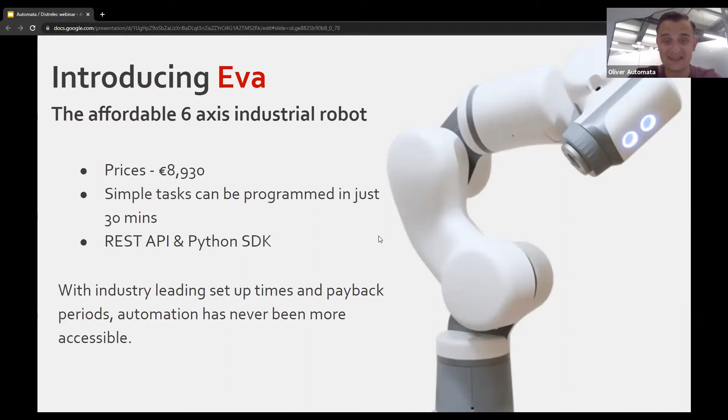And that gives you a reach of 600 millimeters. We often refer to Eva as a robotic arm, and that's probably the best way to think about it - if you think of it as your own arm, you can picture how you can build in different applications based around that philosophy. Eva's got a maximum payload of 1.25 kilograms and a repeatability of plus minus 0.5 millimeters. The other very unique thing about our robot Eva is that the controller for the robot is actually built into the base underneath axis 1, as you can see in the picture on the right there.

That just means it's a very small, self-contained unit that takes up a maximum footprint of 160 millimeters by 160 millimeters. This gives you the flexibility to deploy Eva on or around machines that already exist without worrying about taking up extra space with external controllers or bulky stands that you need to deploy on site.

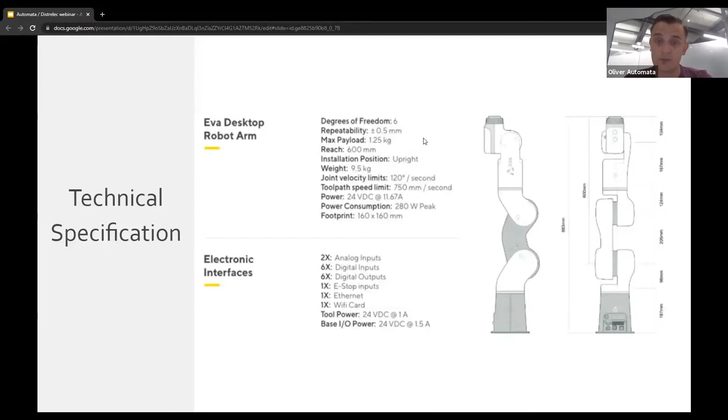I just want to talk about Choreograph. Craig's going to give you a demonstration shortly so you can see how easy it is to use. We designed and built Choreograph to make it as simple and straightforward as possible for our customers to program the robot with little or no programming experience.

What it gives you is a really, really simple GUI that allows you to interact with the robot in real time and build what we call toolpaths, in order to program the robot to tell it to go from point A to point B and so on and so forth.

It's great for really simple or really complex tasks, as you'll see in some of the videos I'll show you later on. You've got built-in grid functionality, which allows you to pick and place items from perhaps a tray or place items into a box.

You can use multiple different users and permissions on the robot. So once somebody's programmed it, you can have a user account dedicated to somebody that will just come in and hit start on the program and allow it to run. It can be programmed in under 30 minutes.

One of the strongest points here is that it can be accessed directly through a web browser - there's no additional software, no disks required. You can load up the robot, load up a web browser on any device, whether that be a laptop, a PC, a mobile phone, or a tablet, and run those programs and toolpaths without needing a special controller.

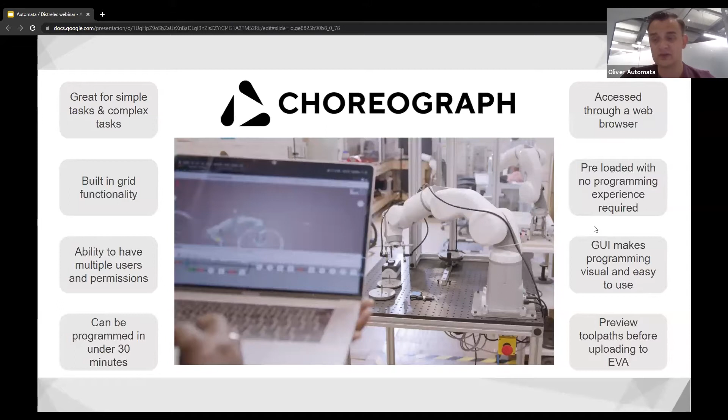It's preloaded with Choreograph, so all you have to do is hit play and away you go. The GUI makes it very simple and easy to use, so you can see what you're doing as you go along - it's very intuitive. You can then preview all of the actions before you upload them to the robot, so you're not going to run into any incidents when you're actually live in the field.

Fantastic, thank you Oliver. Alex, if you could cut those slides, we're going to go live to our little demo room. I'm surrounded by robots at the moment - I've got one behind me here, but I'm going to pop round into the other frame so we can use this robot here. So this is Eva. As Oliver said, we're talking about going from box to toolpath in 15 minutes, and this is how the robot comes out of the box.

So you come through the assembled robot. All we've done here is added a gripper. This is a Schunk EGP50 gripper. We've got a little mounting plate here and a simple cable from the gripper to the head I/O.

That's just sending digital signals to and from the robot to the gripper so we can operate it simply. In terms of mounting the robot, which is probably your first concern, we've just got 4 M6 bolts in here, secure it down nice and simply. So if you want to either build a cart to move it around, or build a table, you can just drill through a sturdy table and get that up and running quickly. Again, as Oliver said earlier, oftentimes our customers are moving it around.

And actually you'll see here, we've got the base of the robot, and that houses the controller of the robot. So there's no external things to move around with it. You can take basically just this unit, put it on one toolpath in the morning, put it on another in the afternoon, and you're absolutely grand.

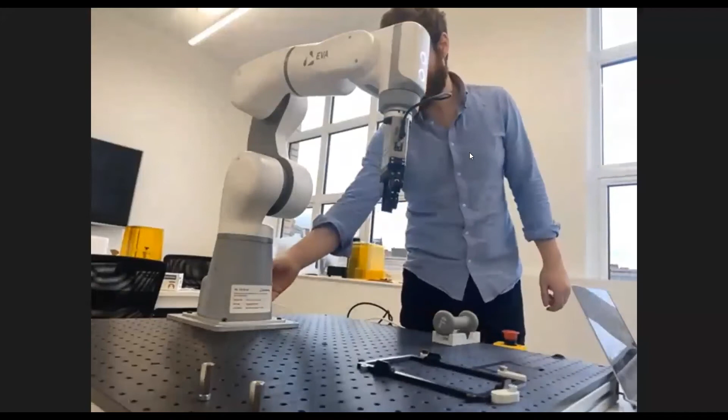It's just a case of plugging in the power and the emergency stop button, the big red button, which is here. You know what happens when we hit that, everything stops. So yeah, as I say, just plug in the power, plug in the e-stop, and then I've also plugged in an Ethernet connection just for today, so we can connect to my laptop.

Again, as Oliver touched on earlier, we've got a Wi-Fi connection connecting it to your main network, or indeed you can connect to the robot as if it was a Wi-Fi network itself by connecting directly. You see we've got this nice little label on the front here. You won't be able to read it, but it's got my Wi-Fi password on it there.

So yeah, EVA is a 6-axis industrial robot. So we've got axis 1 here, 2, 3, 4, 5, and a final rotational axis here, which you should be able to see in a second. I am going to unlock the robot so we can start moving it.

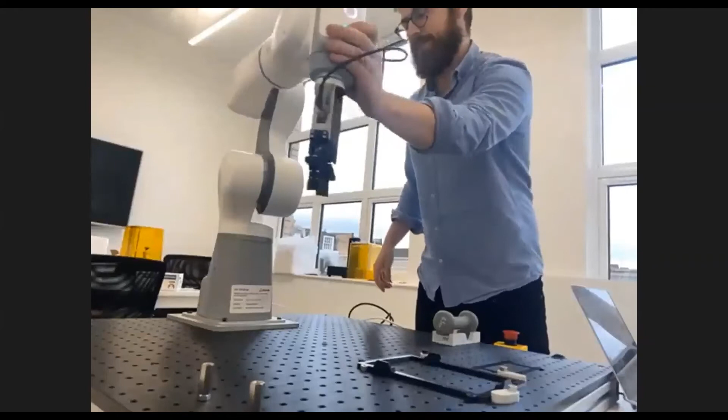So what you can see on the front here is we've got 2 buttons. And this button here is what we call the back driving button. And if I press that, it allows me to release the brakes on the robot, and I gain full control of it. So I can start to move around to the sort of positions that I want. And you'll start to see the kind of range of movement that we have on the robot.

So I'm going to go right out here. You'll see we've got 600 millimeters in every direction. So if you imagine just a circle around the robot and a sphere right up to the top, it's probably come out of shot with the camera, but we can fully extend right up there.

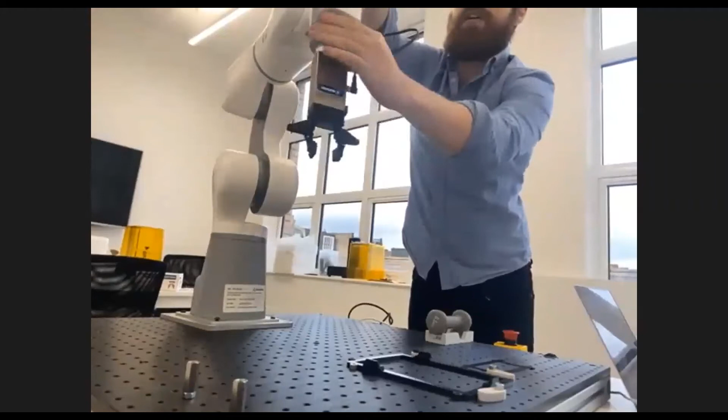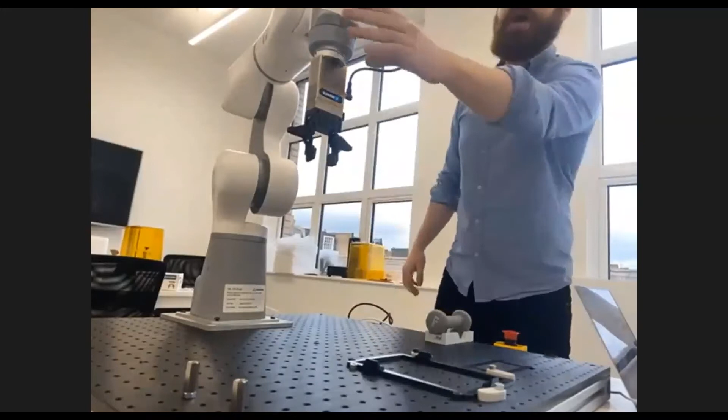And as touched on earlier, we've got that axis 6 final rotation as well, which is one that sometimes people miss. So 6 axes of movement means 6 degrees of freedom. So you've got movement through X, Y, and Z coordinates. And the back driving function is a really important part of what makes EVA simple and ready to program those first 2 paths really, really quickly.

You can drag and drop into all the positions that you need. There's no complex programming. You don't need to know any coding. It's really just a case of dragging it to where you need it and then stringing those things together, which I'll show you how to do in a minute.

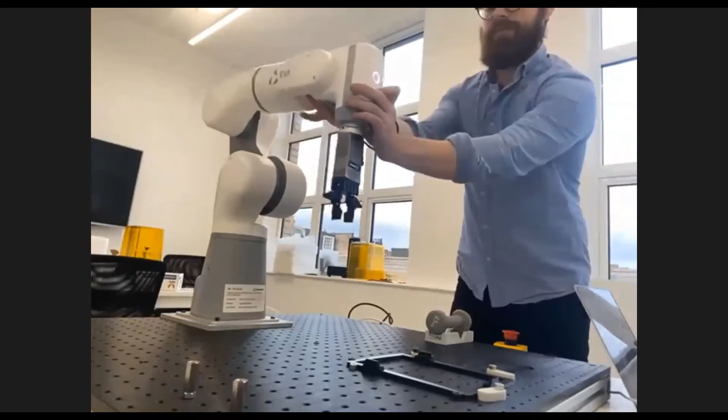The second button, which I'll tell you, is the waypoint button, and that just allows us to save those positions that we've moved the robot into. So if I was to move the robot down here, and I wanted to save that for my programming needs, I'd pop that button, and the robot would save the exact position that the arm is there, and also the X, Y, Z coordinates of the tool center point, which is just underneath there.

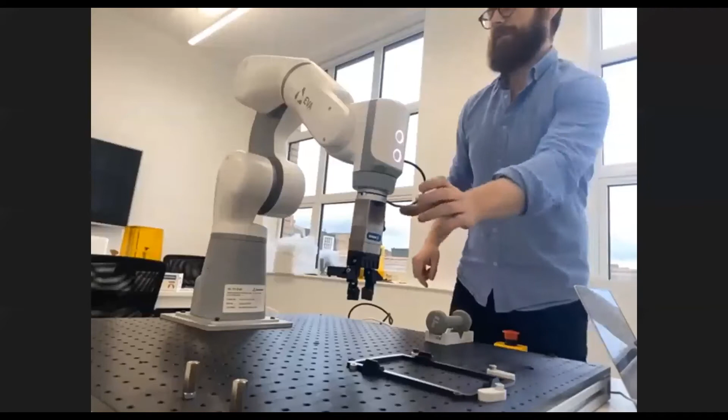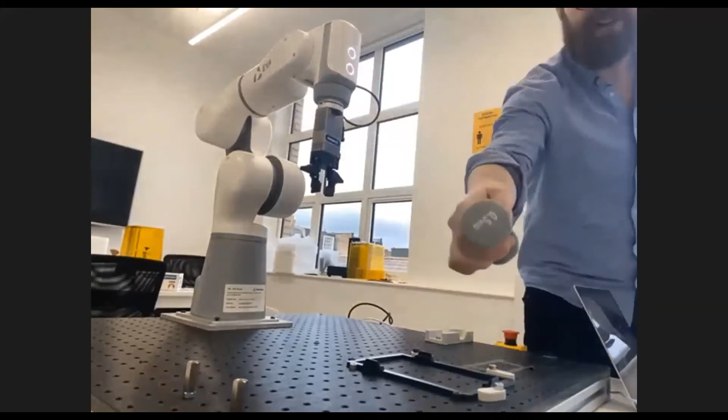So what we're going to do today is show you just how easy it is to program those simple toolpaths. So what I've got here is a nice little dumbbell here. I think it's from one of Oliver's sets, one of his heavy gym sessions there. That's half a kilo. And I'm just going to pop this down here. And we'll show you how easy it is to get one of those pick and place applications up and running. So what I'm going to do is share my screen.

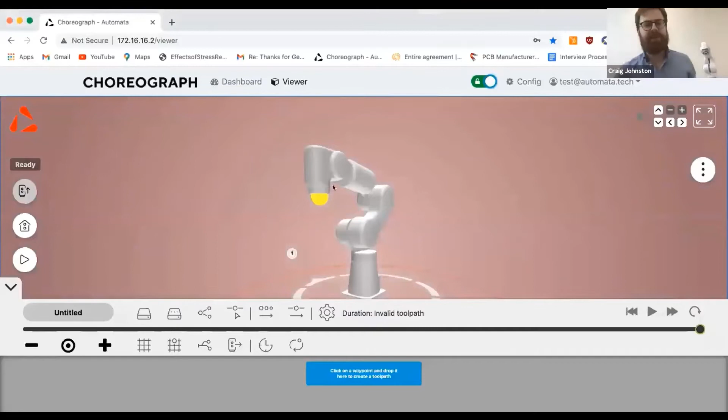So this is Choreograph, which Oliver touched on briefly earlier. That's our GUI, our way of programming simple toolpaths. You'll see a live representation of the robot in 3D, and with point 1 there, that was the point I just saved on the robot. If I grab that back driving button and move the robot, you'll see the 3D render follow around in real time. And we have the X, Y, Z coordinates of the robot, so you have a nice, easy way to...

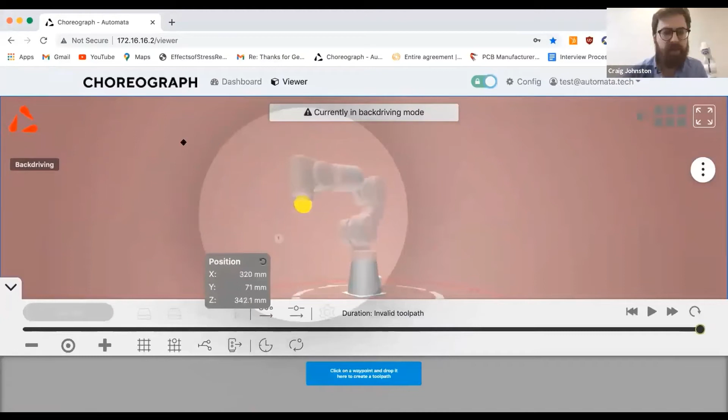I'm having some technical difficulties. There we go. Does not always love Zoom.

There we go. So yeah, you'll see that X, Y, Z coordinates following the robot around there. So yeah, I've got my dumbbell over here.

So to program that, I'm going to first drag that robot down using the back driving as we saw earlier, and put it in a position where I'm going to pick it up, right over the center point of the dumbbell. Then, as discussed earlier, I'm just going to save that waypoint. And you'll see number 2 there.

When we pick up, what we usually want to do is pick up and go straight up, like that. So we don't want to go across or to the side, we want to go down, then come vertically up by a certain amount of millimeters.

So instead of dragging and dropping that, I'm going to take this point and use this function here, which is the clone function. That basically just duplicates that waypoint. Then I'm going to use the absolute movement function here - you'll see those X, Y, Z coordinates again - and move it through the Z axis. I want it to move straight up, as I said, and I'll shift that up to around 220. That should do just fine for me.

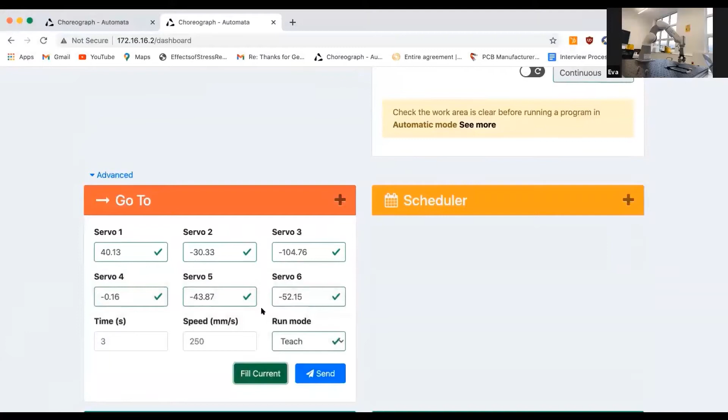I'm going to find out what state it's in at the moment. I can do this on the Choreograph homepage, which gives you live status of anything on the robot - it's the page you come to when you sign in. You can find out the exact joint configuration of the robot, the joint angles, the speed it's running in, the run mode, and what states the outputs are in. So at the moment, it's open - digital 1 is on 1 and digital 2 is on 0, and that opens it.

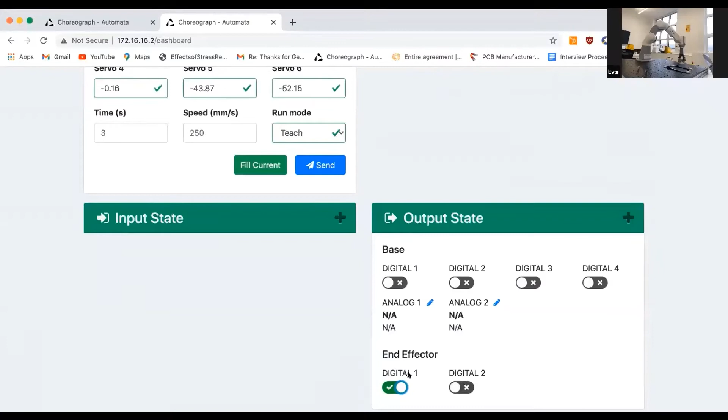So if I want to close the jaws, I'll have to put digital 1 to a 0 signal and digital 2 to a 1 signal. I'm going to go back into our toolpath here, keep digital 1 on 0, and put digital 2 to 1. What that's going to do is allow those jaws to close at that point.

And good practice here is just to put a wait in - you can see our little clock here. That's just to make sure the robot doesn't rush ahead of itself and doesn't pick up anything too quickly. Usually when I'm programming in a pickup, I'll put in a half-second delay there, and that's just good practice to make sure things run properly.

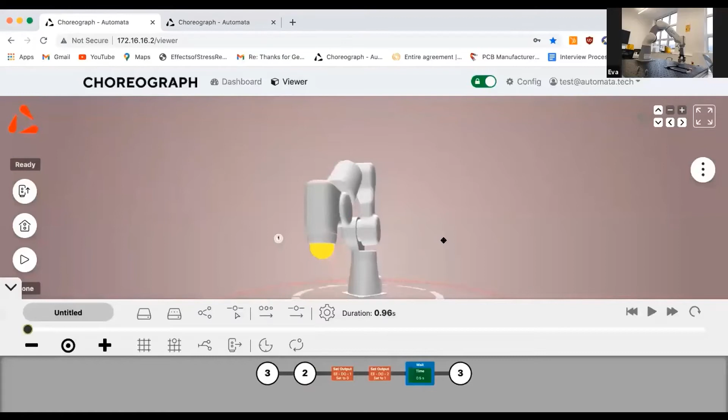The other thing I'm going to do for a toolpath that picks things up is make sure the jaws are set to open at the very start of the toolpath. Before anything kicks off, we want to make sure the robot's in a state where it's ready to do what we want it to do. So I'm going to set end effector digital 1 to 1.

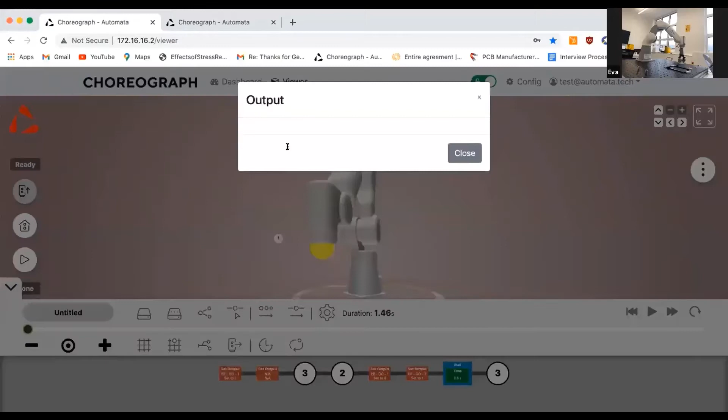Come on, there we go. It's not loving Zoom today - a month in lockdown over Zoom already, too many Zoom quizzes over the past month. It's too much. There we go, back on.

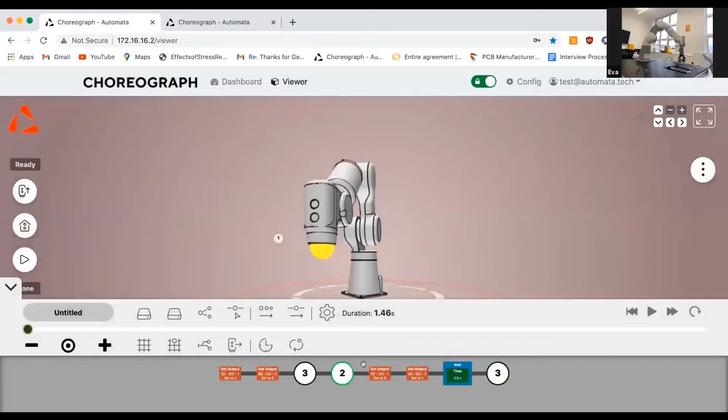I'm going to set end effector digital 2 onto 0. So as we said, at that start position it's going to make sure things are open, starting at point 3. I'm going to move down to point 2 - it's going to close, wait half a second, and move back up to point 3.

I'm slightly tugging on my Ethernet cable here, so we'll see if we have any more luck there.

I'm going to upload that toolpath to the robot, so it's housed on the robot's controller and it's ready to run. In order to start the toolpath, we use this button here and send it to the home position - that's the first point on the toolpath, so send it to point 3 there. Then I'm going to hit play and see how our first pickup goes.

Once we've programmed the first pickup, I'm going to get it to put it down right over here. We always test as we go when building these toolpaths. So I'm going to set it to loop once and run it in teach mode. Teach mode is really important - when programming your first toolpaths it limits the robot's speed to 250 millimeters per second, meaning it's not running too fast. If you've made a mistake in your toolpath, it's unlikely to drive into something at high force or injure someone working nearby.

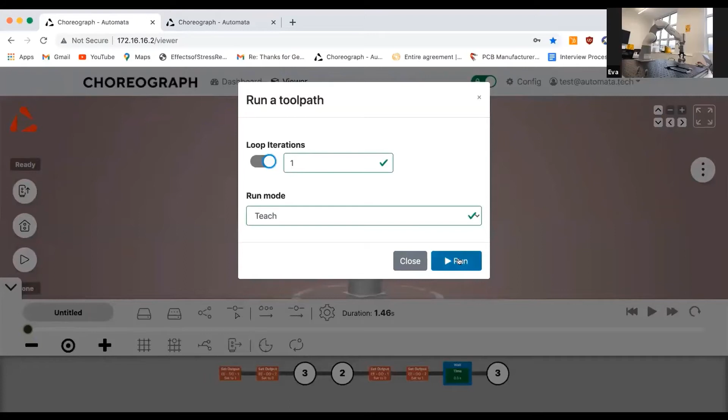As ever, when running my first toolpath I've got my emergency stop button right here, ready to hit if anything goes wrong. But I'm pretty confident this one should be okay, so we're going to hit run. And there we go - we've got the robot moving down, picking up the dumbbell there, nice and simple.

So what I want to do now is program it to move over here and put the thing down. One nice thing about this demo is that the robot puts the dumbbell down in the same way it was picked up. That's something people can underestimate about simple toolpaths - a human has a wrist, which gives full flexibility, plus fingers to manipulate things as you go. It's much more difficult for robots to manipulate things in flight. So if you're looking for easy toolpaths to start with, an application where something is picked up and put down in the same way is a great place to start - Oliver will have some great examples later in the webinar.

For the moment we're going to keep going here. I'm going to move over here, and we're going to save a waypoint again.

Dear me, it's not loving my cables today. They took away my usual robot - it's down in Aldershot doing something exciting today, without me sadly.

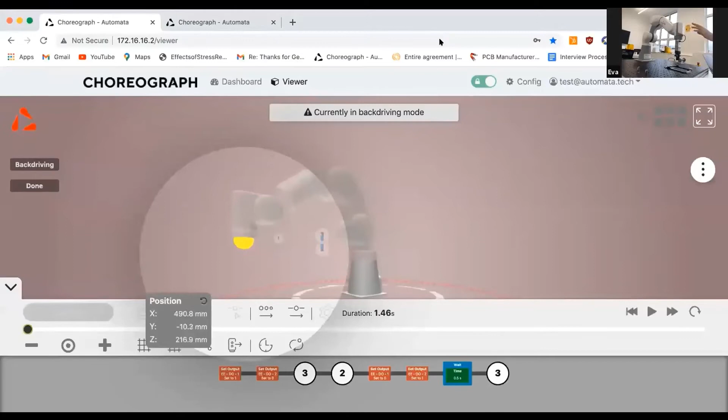So I am going to flip over to my other screen now just to show you programming the rest of this in real time. You should be able to see just my video there. So I've saved that point.

And I am going to add it to the toolpath. And I am going to save one down here, add it to the toolpath.

And again, I'm just going to do what I did before, which was set the jaws of the gripper to open, so that's our 1-0 if you remember, and that's going to put it down nice and easy. I'm again going to upload that.

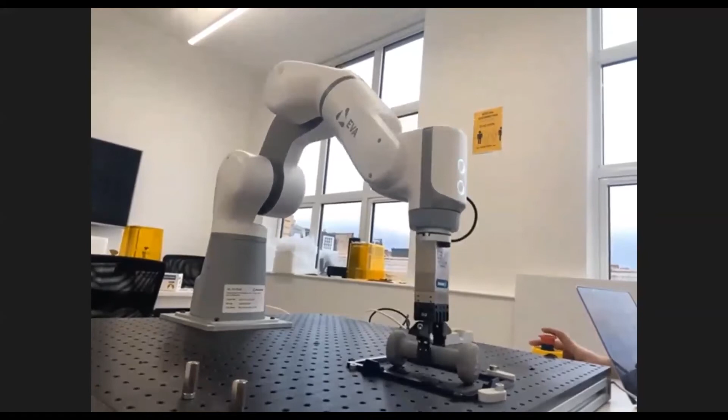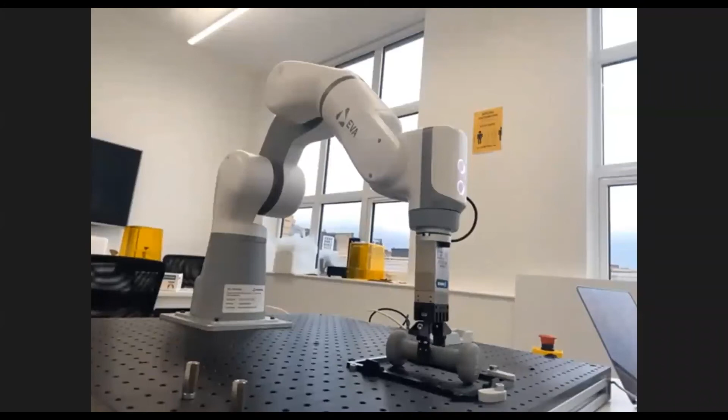I'm going to send it to our home position, and we will have a really quick pick and place programmed in live time there for you, with only minimal technical difficulties on Zoom's side, which I'm going to say is a win for me today.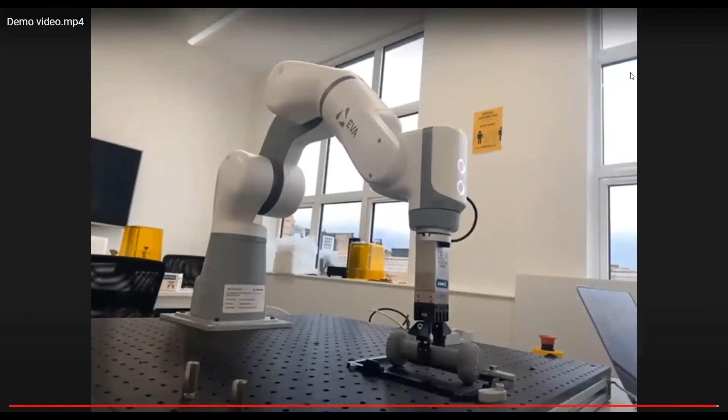So yeah, that's a really quick, really dirty demonstration of how simple toolpaths are really easy to program. There's a whole range of things that the robot can do, and we've got Oliver coming up very shortly with some much more interesting videos, but that will give you an insight into just how quickly it is to get set up and running. I think I've run slightly under my 15-minute goal, which I'm quite happy with.

There we go, excellent, that was. I hope you all found that fantastic, beneficial, let me just try. Thank you, Oliver, there we go. That's better, fantastic, thank you. There we go, that's better.

I hope you all found that beneficial. That was a video we actually recorded a little while ago that I wanted to play for you today. Craig's actually unavailable, helping to deploy a project, so it's good to have something that we can play back to you so you can see it working in real time. But there was lots and lots of information to take away from there, and I think the main takeaway, the one thing that we constantly shout about with Eva, is how easy and simple it is to program. That was done in less than 15 minutes, and I think it was very, very clear that it doesn't take a lot of knowledge or experience in order to be able to do it.

So where I wanted to go from here is I wanted to show you some live examples of where we've deployed Eva, just so it might help you to envisage your application in real time, with other people that have already carried out the hard work, I guess, in deploying it. Just to give you a bit of a caveat here, some of these videos are a bit rough and dirty, filmed in real working manufacturing sectors, but I hope that gives you the best examples of Eva already being deployed.

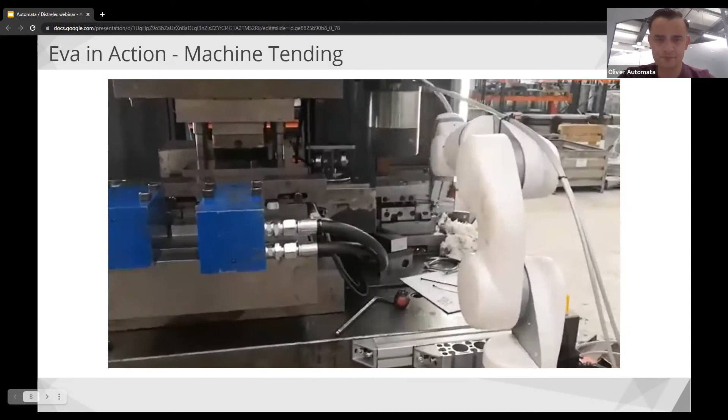So Eva is mounted there on an aluminium profiling that's just been bolted to the front of the machine. I like that more than anything, because having known this customer when they first purchased their robot, they actually used this robot for this application in the morning. Eva's then unbolted and moved to an entirely different application in the afternoon, which for us just shows how versatile the robot actually is.

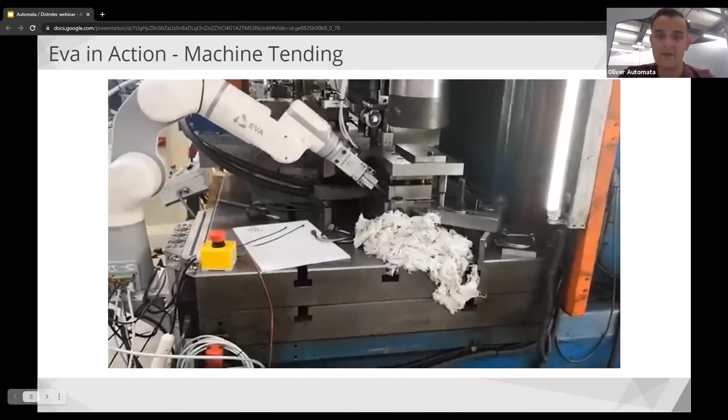But what you can see there is Eva picks up the metal bracket on the left. It's then fed into the press, the press operation is carried out, and then the completed parts are dropped into a bin on the right-hand side.

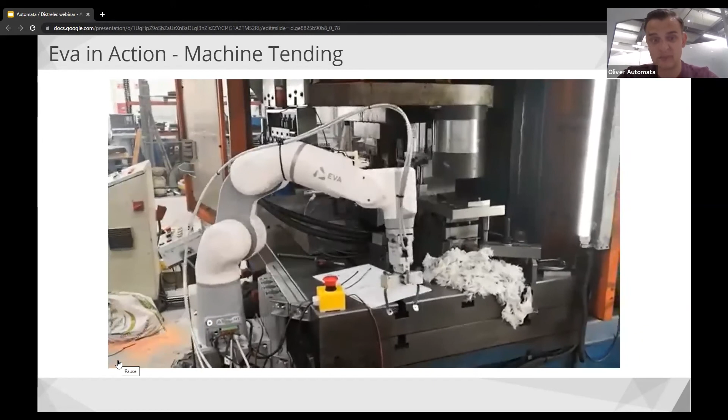And this is a really good example of where you can deploy a robot without the need for an expensive PLC, or without the need for any other expensive kinds of safety equipment or other alternatives. You can just bolt the robot to the front of the machine, carry out the operation that you want to carry out, and allow it to do the job that it needs to do.

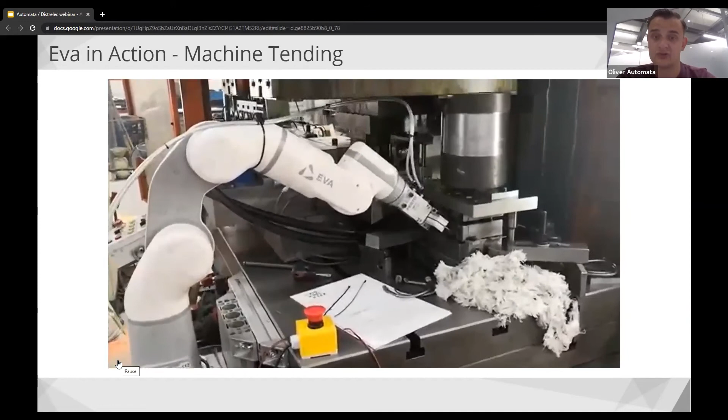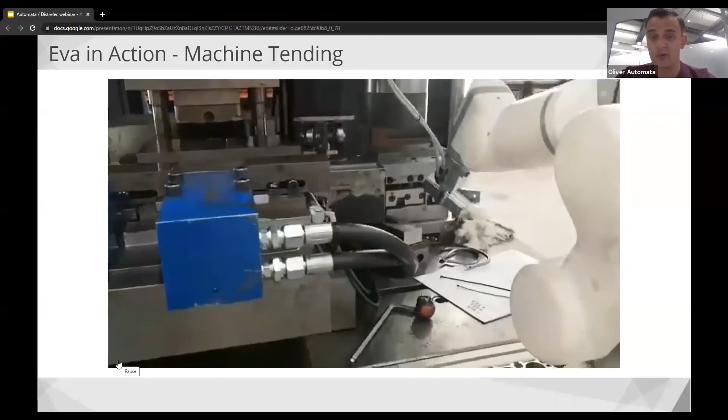This setup would have probably cost somewhere in the region of 11,000 euros, which is considerably less than even if you were going to try and purchase a robot from other manufacturers that already existed on the market.

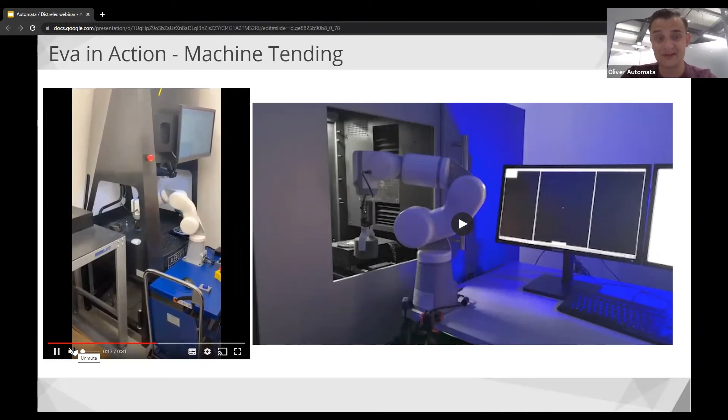But you've just got Eva picking up parts that are usually presented in a tray, loads them onto the CMM machine on the left there, and the majority of the application is clearly carried out by the CMM machine in this case. But it's very, very easy for Eva to just get involved in the loading and unloading. What you would probably find is you might inspect 1 in 50 parts previously.

Having a robot or deploying robotics in this kind of example allows you to inspect many more parts, much more frequently, for less cost. This example is a much larger CMM machine, but the concept remains the same. Eva comes down, picks up the part, places it inside the CMM machine, and allows the operation to be carried out. It's this kind of machine tending we see all the time, and for a robot that costs less than 9,000 euros, compared to the cost of someone operating that CMM machine manually, it makes absolute sense to use robotics for that kind of task.

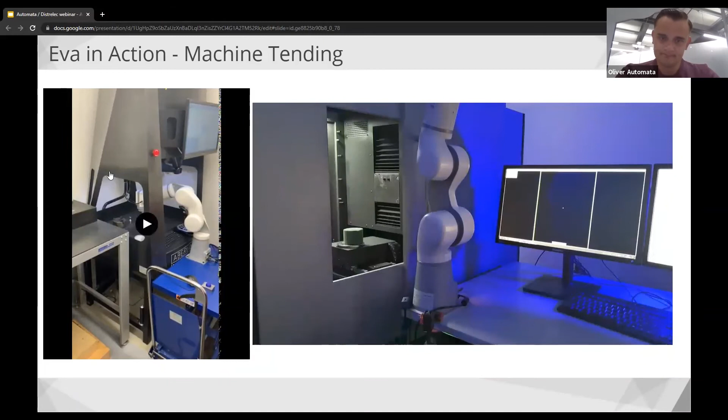Very simple and straightforward. I'll flick on to the next slide here.

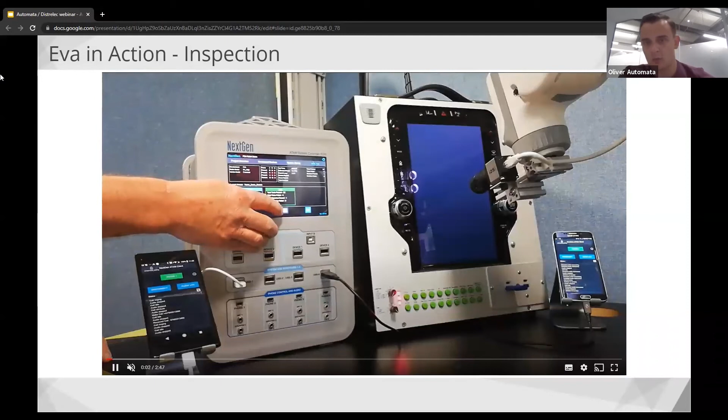This slide is actually for testing and inspection. Some of you who have visited the Automata YouTube page will be very familiar with this video. It's one that we've shared a lot, and probably one of my favorite videos. It was one of our very early customers at Automata. I'll hit play because it's quite a long video, I won't make you watch it all, but this company sells testing equipment for car stereos, as you can see here. The testing operation previously had to be carried out by a human.

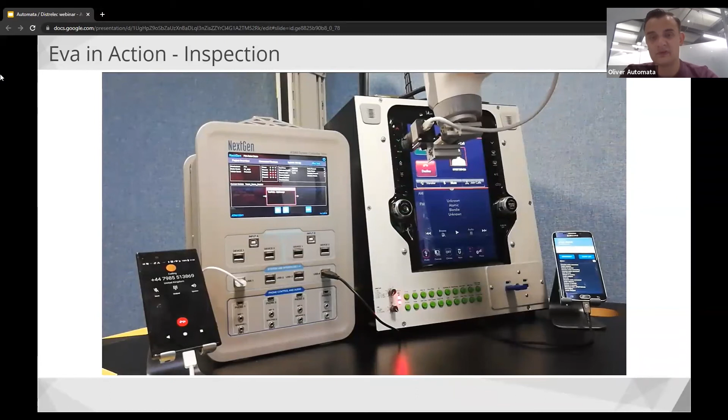You can see there's a small camera mounted to the end of the robot, along with a small stylus. What's actually happening is the camera is reading the screen you can see there, feeding the data into the box on the left, and then it's telling Eva what operation to carry out for the testing. So instead of having somebody sit there and press buttons for days on end until they get an answer or a failure, we're able to carry out these processes using robotics and a bit of machine vision.

In order to save that person's time and the cost of doing that application, this company is actually selling this finished solution into the big automotive suppliers to allow them to test their car audio equipment.

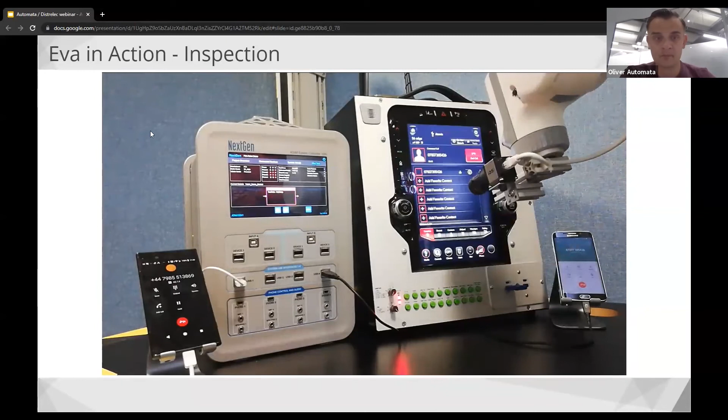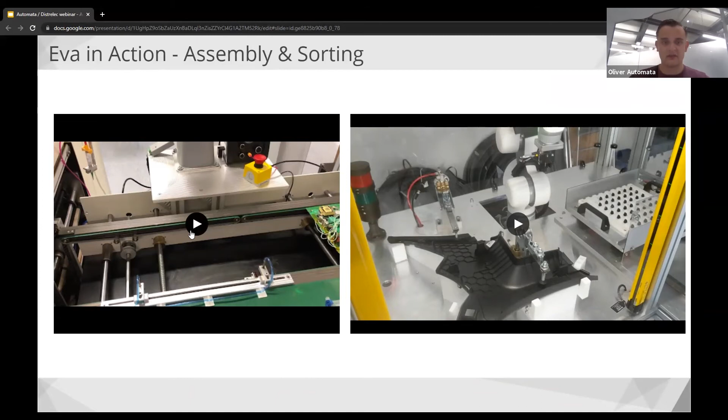So the next videos I've got here are assembly and sorting videos. Assembly is another really popular application for us, especially in manufacturing environments. The video on the left here is a gluing application. Gluing is often one that, when I talk to customers about, we don't support inline gluing, but this particular application is just a spot gluing application. You can see the robot comes down, dispenses the glue onto the circuit board, and then moves away.

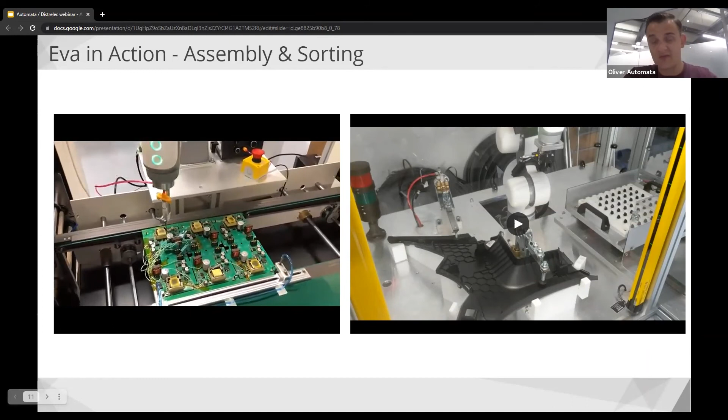These kinds of applications are really simple and straightforward. It allows you to get better repeatability than you would perhaps get with a human operator carrying out this task, because a robot is only programmed to go to one place time and time again. As long as everything else lines up, you will always get a perfect application, whereas with a human operator doing it manually there's always an element of human error.

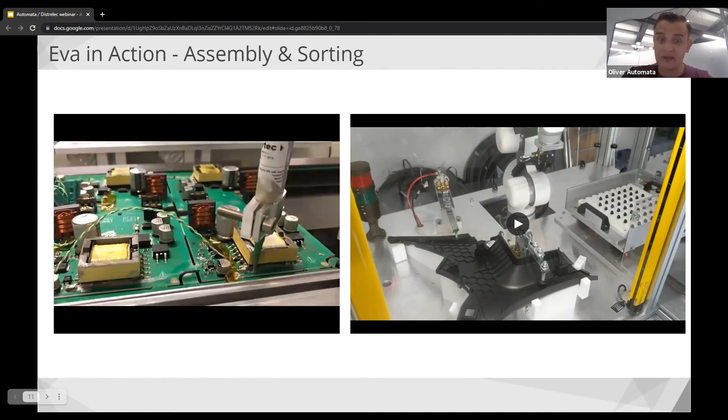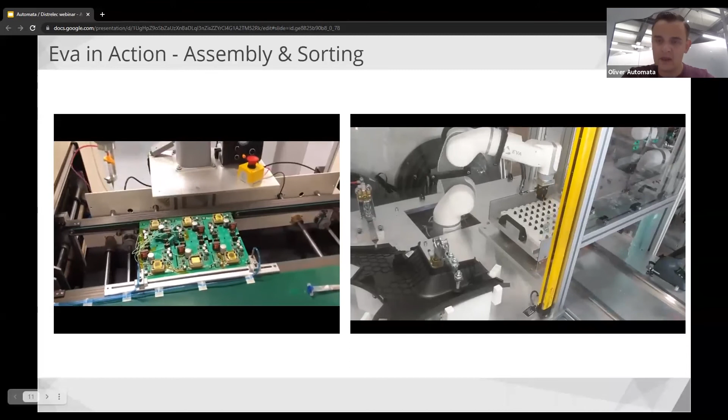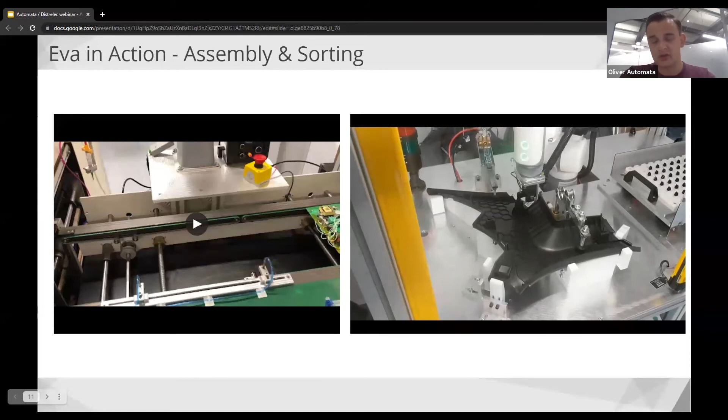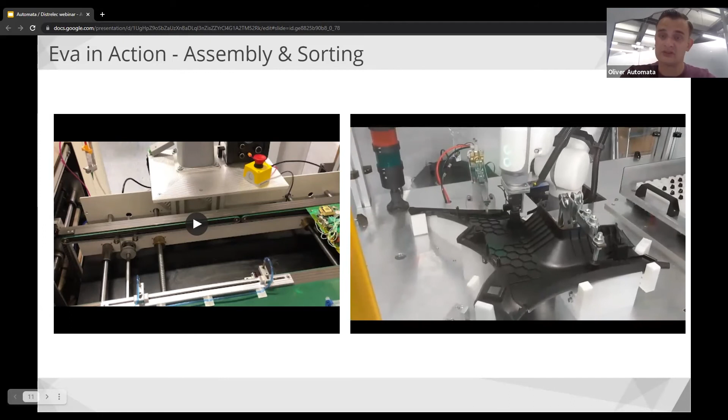The video on the right here was actually produced by one of our systems integrator partners in Italy, and they use EVA to place clips into plastic bumper parts for a popular German car brand. You can see EVA here is built into a much more complex cell design. The integration is obviously considerably more expensive and has taken many more man hours to achieve, but the concept is the same: you're using a very affordable robot to carry out a really simple application that previously might have required much more expensive robots. They didn't need to do that anymore because they had a robot like EVA available, ready to use.

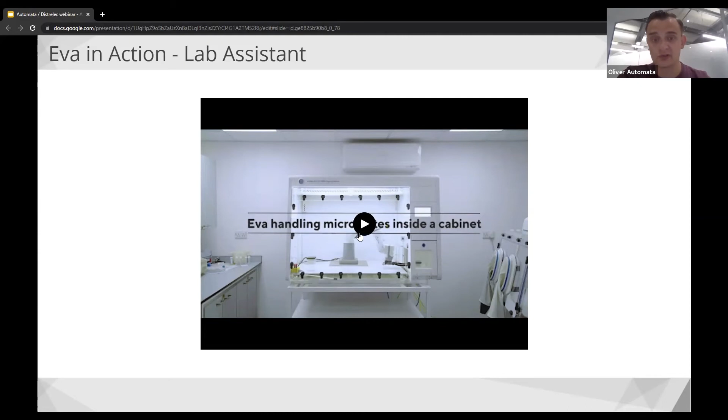And then the final part of Automata's business is lab automation. So EVA, being small in size and having a relatively low payload, lends itself perfectly to laboratory automation. Whether that's automation within a pathology lab or medical device manufacturing, we have the software protocols in place to handle those kinds of applications.

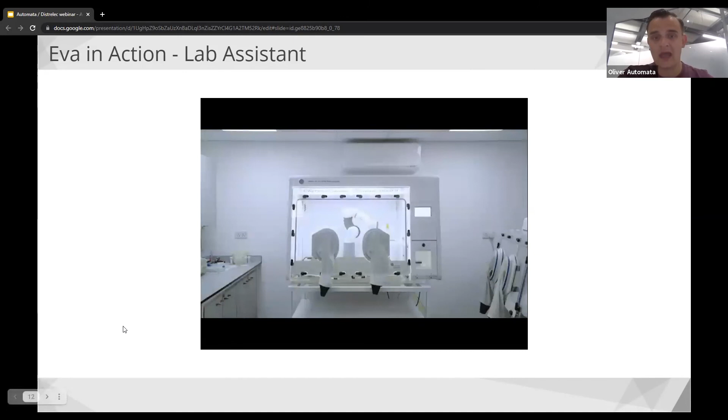This is just a really simple video of EVA working in an atmospheric chamber, where you might sometimes see somebody with their hand through the gloves, operating and working with these microplates manually rather than having it automated.

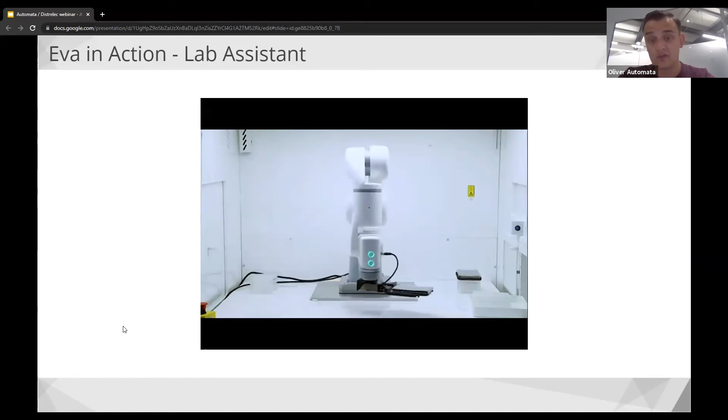This particular video was filmed with a company called Don Whitley Scientific, who are based in the UK. EVA still lends itself to lab automation across the board, and we've seen lots of success in this space. EVA as a product currently processes 100,000 COVID tests a day in the UK, which we're very proud of.

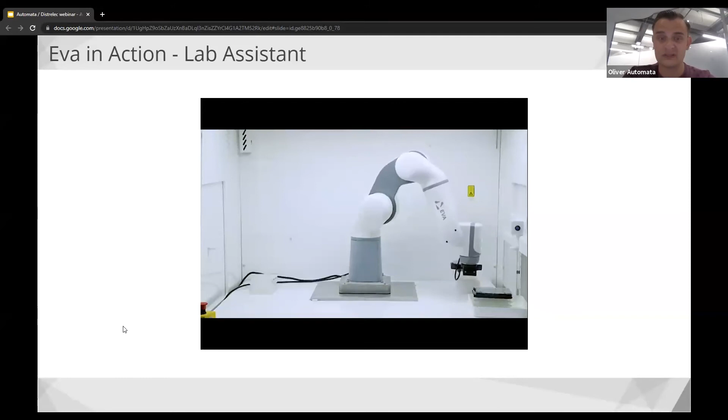If you've got any specific lab automation requests, we're more than happy to speak to you about it and talk about what we can do and what we can offer in that sector.

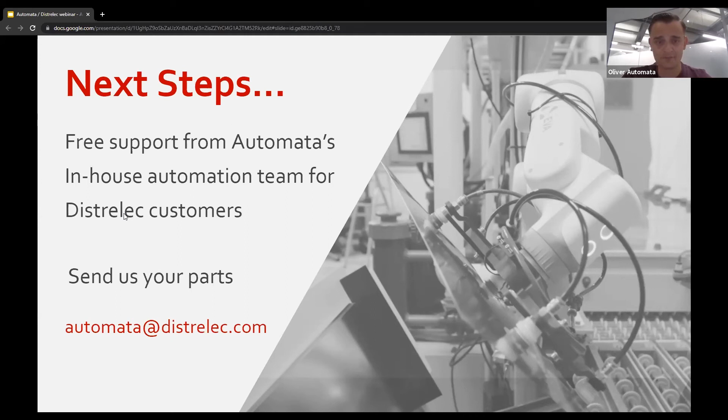The first question is, can the robot be mounted horizontally, or does it always need to be mounted vertically? Right now you can only mount EVA vertically, and that's because there's a gravity value accounted for when you're doing the programming. However, we've just about to finish the work on being able to mount EVA horizontally as well, so within the next few weeks, you'll be able to mount it in an alternative way. That's the other huge benefit of Automata and the Automata software over lots of other providers.

Choreograph is constantly being updated. We have new software updates every 2 weeks that are constantly launching new features, and we do that based on customer feedback. So if you've got a robot and you're already using it, but you think there's a feature that you would like to see added, we're able to build and deploy features like that very, very quickly, which is why we've done such thing here.

We've got another question about using EVA as a medical device in medical device manufacturing. Yes, absolutely. Happy to pick that conversation up offline and chat a bit further about it. Please use the email address on the screen, and we'll talk you through what we've done previously and how we validate the steps that we're taking.